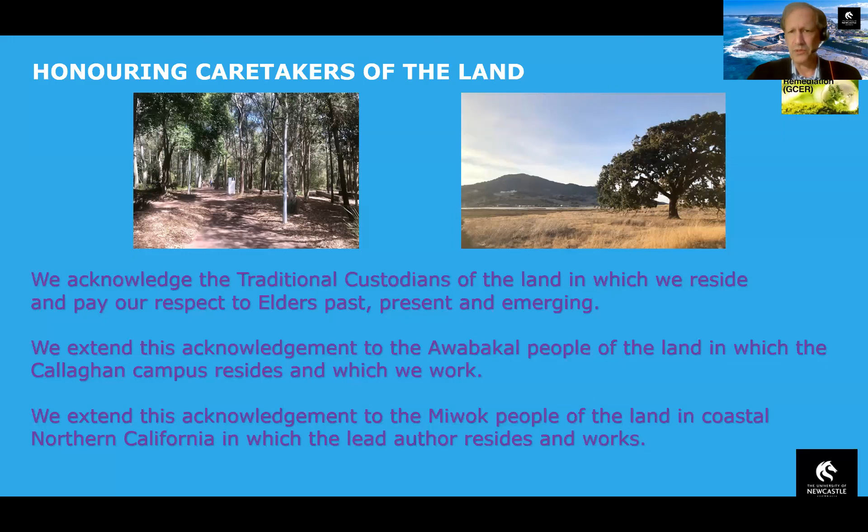So today, over the next 15 minutes, why is this different? That's what we're going to talk about. We talked yesterday in one of the sessions about sustainability. We're going to bring that forward and also add the ideas of resiliency and durability for our groundwater treatment remedies, because that's where we're headed, right?

Our designs primarily to date have looked at historical climate records, maybe current, but moving forward is something different. We have to look at those changes, talk about the effect of changing conditions on the remedy, and then we'll close it out.

There is a lot of information out there that tells us about what the climate conditions are going to be throughout the world. We have information for Europe, Australia, North America, South America. Moving forward there's still uncertainty, but we see these trends. Fortunately, we have research and government agencies that allow us to capitalize on the information collected on downscale models, and we start understanding what these trends are that we're going to see.

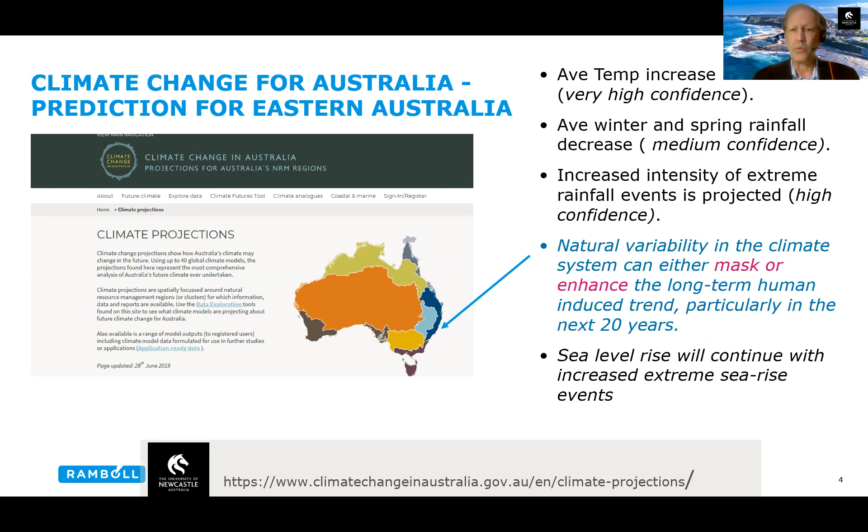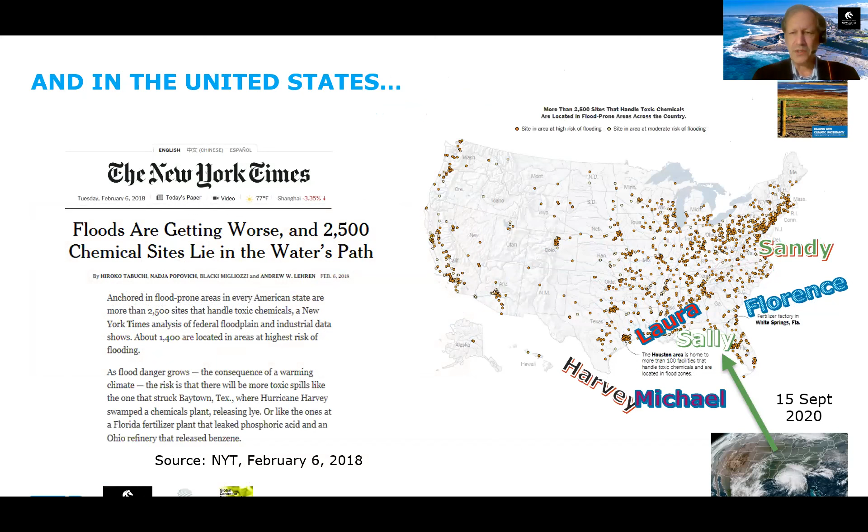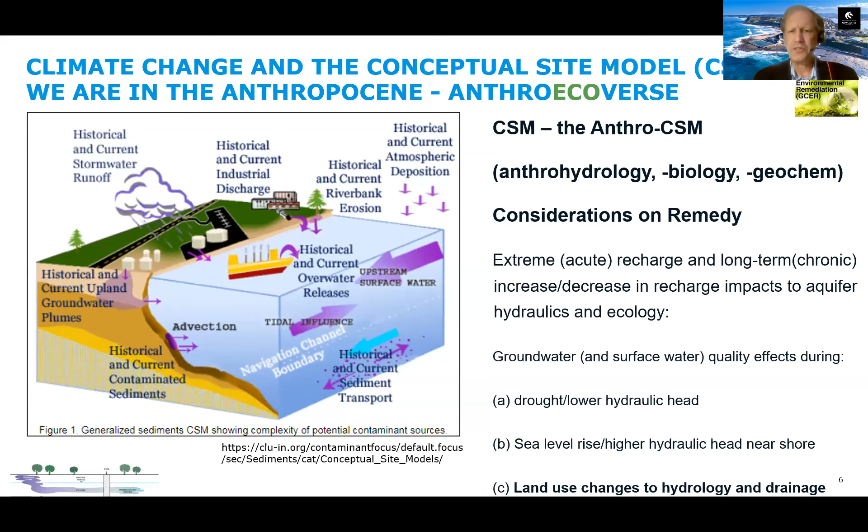We've changed our ability to infiltrate, think of urban soils for example. We've brought in different materials from different places. We've changed the carbon content, the oxygen content, et cetera. So the issues about changing hydraulic head today and into the future, sea level rise, groundwater rise, land use changes, this all comes back into it.

I want to quickly bring in these terms. Yesterday there was a whole session on sustainability. I'm bringing in the concept of resiliency, the ability to recover from these changes. And then durability, which the US federal government identified 5 years ago from the standpoint of looking at long-term measurable benefits. So the designs are looking at that.

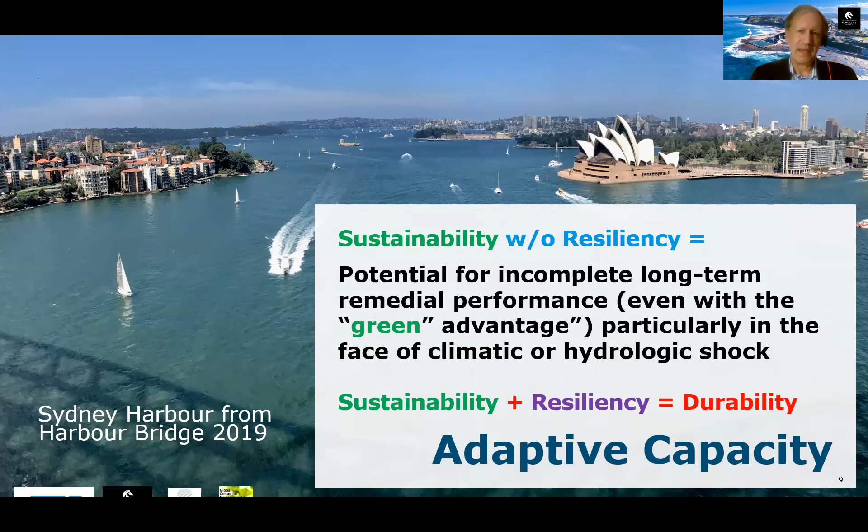I want to put out there this beautiful view. If you haven't walked across the Sydney Harbor Bridge, please do so. It's a beautiful site. There are environmental sites that ring the entire harbor, and the issue of sea level rise, once again, in this catchment is important. It's not just about being green, right? It's about, can we make these systems last and become durable?

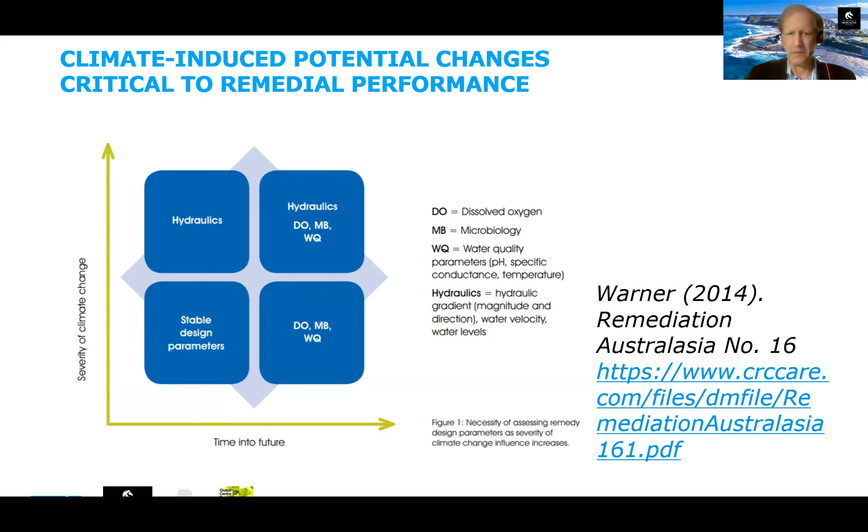This is one of my favorite slides from the standpoint of the range of really good approaches, and one of the questions is, if these remedies have to last a long time and we can't, say, remove the chemicals or create our risk management protections in a short time, we may have to deal with some of these changes. So the longer in time we go, the more the changes we might expect in hydraulics, dissolved oxygen, microbiology, and water quality, pH, et cetera. This is kind of the key thing about designing going forward.

Quick example, the PRB - I mentioned I worked on this for 25 years. This is not an unfamiliar technology. It's been used in Europe, Australia, the US. The issue is we're trying to create this barrier of some treatment material. Here's actually a picture of the very first one that went in back in 1994, across a contaminant plume, using a material - in this case it's zero valent iron, it could be a bio material, it could be a compost, et cetera - and create these treatment areas.

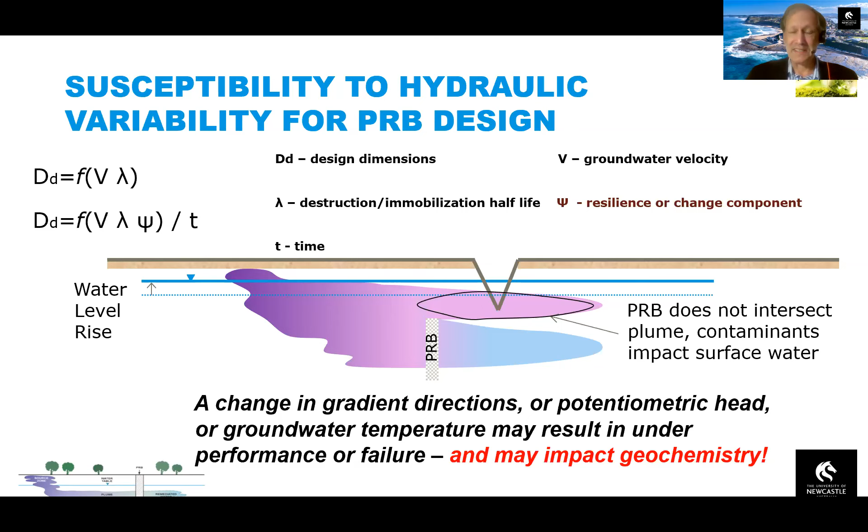If the water level changes and we lose capture, we may lose capture of our treatment, right? So that's one of the questions: how do we deal with being able to anticipate this, and how do we deal with actually designing for it? I'm not going to talk today about how to anticipate it - we'd probably take 5 days talking about models and all that and what we're going to use. But I do want to bring in that aspect of the conceptual model and some things we can think about.

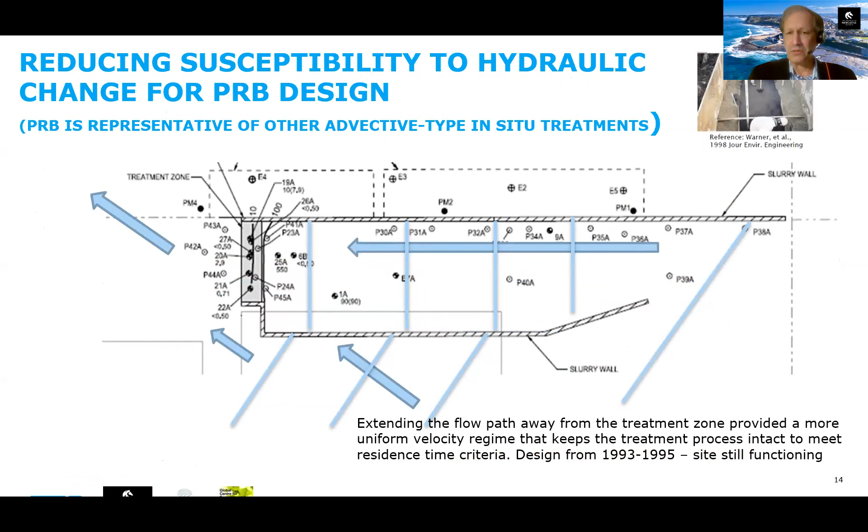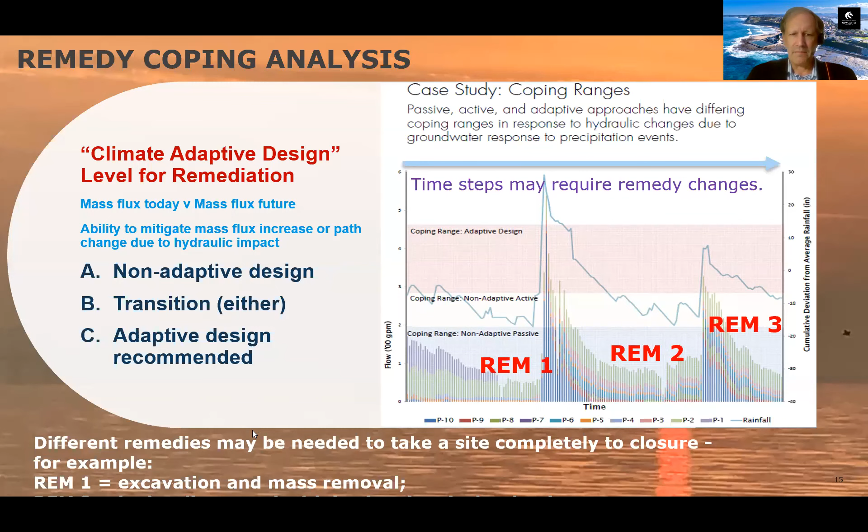This diagram you see in front of you is an actual example, as we're using, say, a bioremediation system. Is there a way to encapsulate or protect, maybe remove oxygen with another amendment? Iron is a good one, so that we prevent the oxygenation or the oxic effects, the aerobic effects, from taking over if we anticipate that happening, right? So we may have a whole different set of these going forward.

So let's wrap up here in what we've talked about. Thinking about future changes is part of our job. If we're in a sea level rise area, and we're interested - this came up actually in a course I was teaching a couple of weeks ago - the issue of, well, what kind of phyto vegetation should I use on a coastline? Maybe there's a salt tolerant vegetation that works just as well as a non-salt tolerant vegetation, but can actually accommodate those changes in sea level and groundwater, right?

So thinking about that for the hydraulic gradient changes to a PRB as an example, which could also be a bioremediation system, looking at redox zone designs to handle those changes, redundancy in our hydraulic capture buffer zones. I think one of the more important things we have to do - and there may be some talks on this later today or tomorrow, if not we'll make one - is to look at monitoring innovations: in situ redox monitoring on a regular basis, in situ hydraulic monitoring on a regular basis, because those longer term changes, sometimes subtle, is what we're interested in to help us.

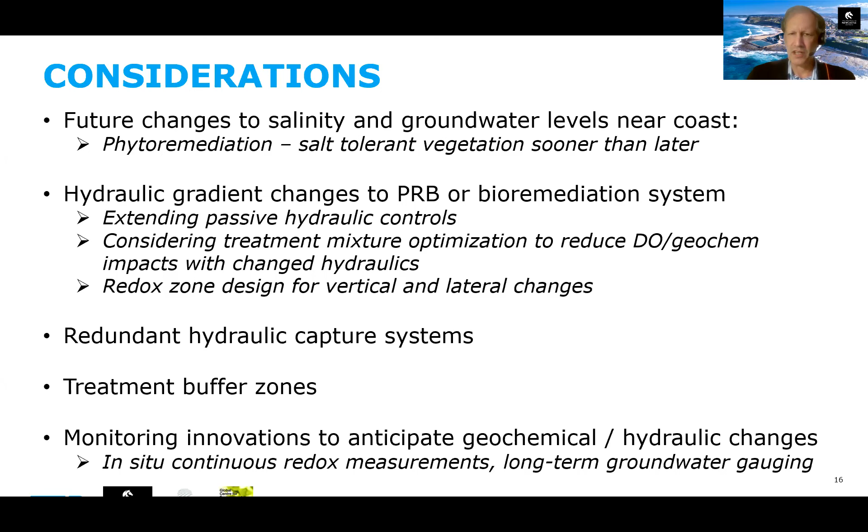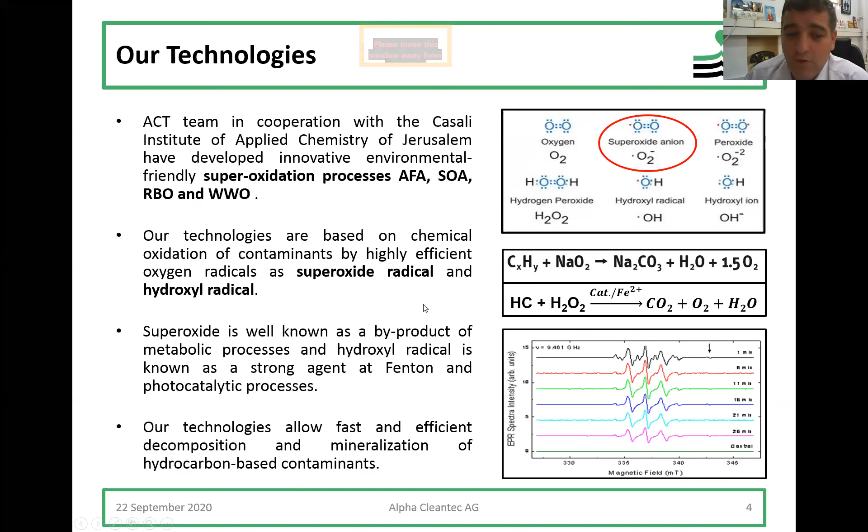So we propose three types of technologies, three types of solutions, and three types of application: soil treatment, wastewater treatment or groundwater treatment, and the cleaning of railway ballast. All the processes are in situ or on site, depending how you consider it.

Our superoxide radical allows us to efficiently decontaminate a wide range of different organic materials. We're talking about BTEX group, petroleum group, aromatics, polyaromatics, chlorinated solvents, PCBs, dioxins, pesticides, herbicides. All of them can be efficiently decomposed by our methodology.

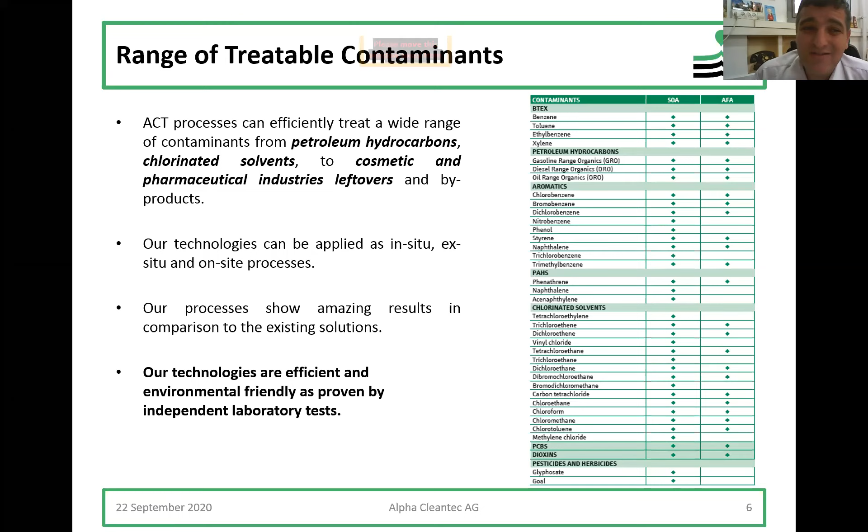And the biggest advantage of this is that it happens very fast. Our methodology is extremely fast. We may be one of the fastest solutions on the market because the radical attack is extremely fast. That's what allows us to decompose highly concentrated contaminated soil or water in a time of minutes to hours.

Here you can see some examples of materials that we treated. For example, PCB decontamination - we can reach more than 90% conversion in a single treatment. Also diesel leftovers or crude oil - in all cases, we can reach very high conversion levels under a simple single treatment.

Our process is efficient for contaminants from concentrations of 0.1 ppm to 100,000 ppm - it's really for a crude oil spill, okay? Recently, our technology was also chosen by the Solar Impulse label. They decided that our solution is efficient and green. We're one of the 1,000 technologies they chose to promote.

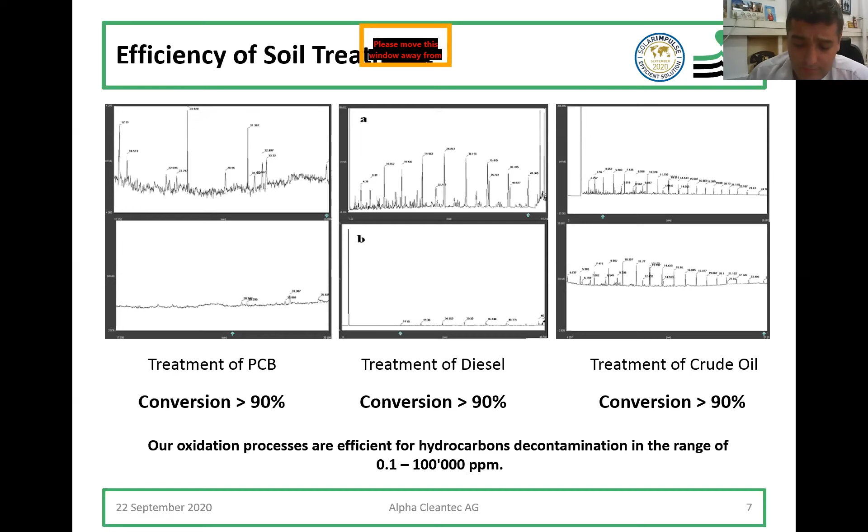And here we can see some examples of decontamination of chlorinated materials. We can decompose a wide range of different types of chlorinated materials, and the only end products in this case will be carbonate salt, a little bit of salt, and oxygen. We can do this for very high and very low concentrations of chlorinated materials.

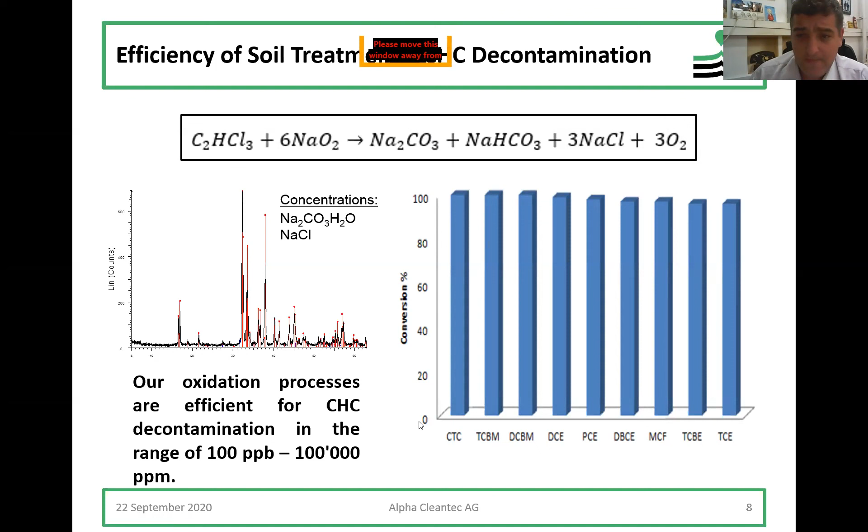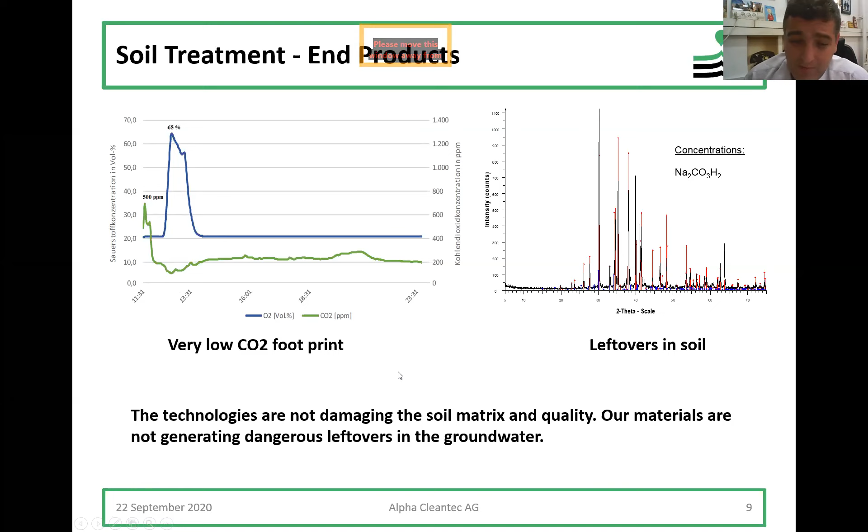A little bit about CO2 footprint. Our technology, as I told before, is unique in that we have a very low CO2 footprint. We are not generating carbon dioxide at all, almost at all, unlike any standard incineration or oxidation process where you take in organic material, add oxygen, and get carbon dioxide. In our process, the only end product is carbonate salt. We mineralize the carbon dioxide as well. So our CO2 footprint is extremely low, and this was proved by TÜV Germany's independent investigation.

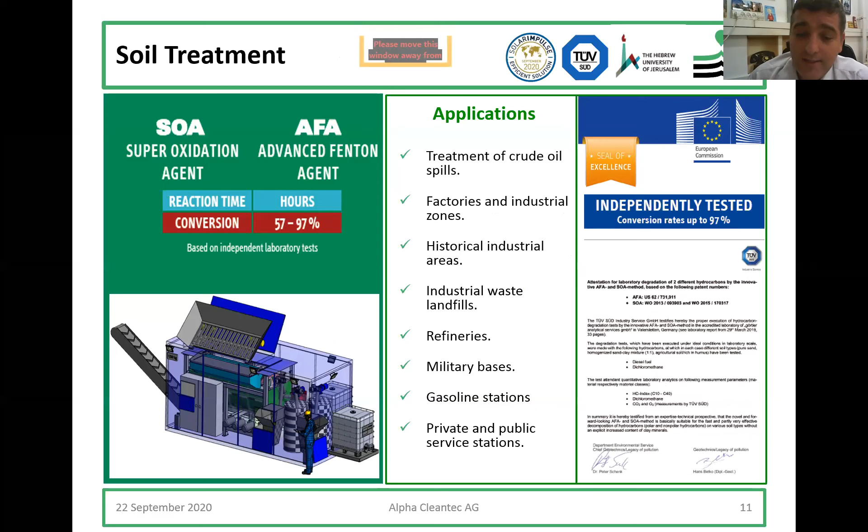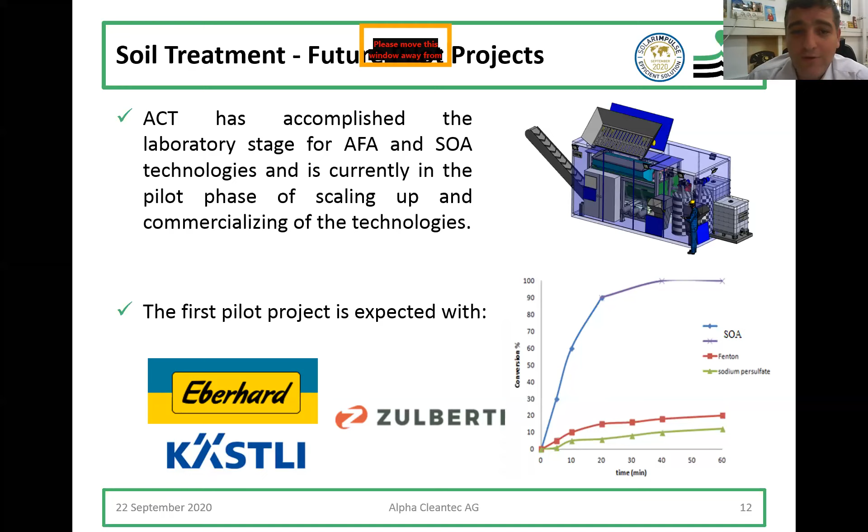As I told you before, we were certified by TÜV Germany. It's an environmental and efficiency standard. We were supported by Horizon, and that's where we are. We're starting first pilots with two Swiss companies, Eberhard and Kästli, and one Italian company, Zulberti. Hopefully by the end of the COVID crisis, we can start first executions.

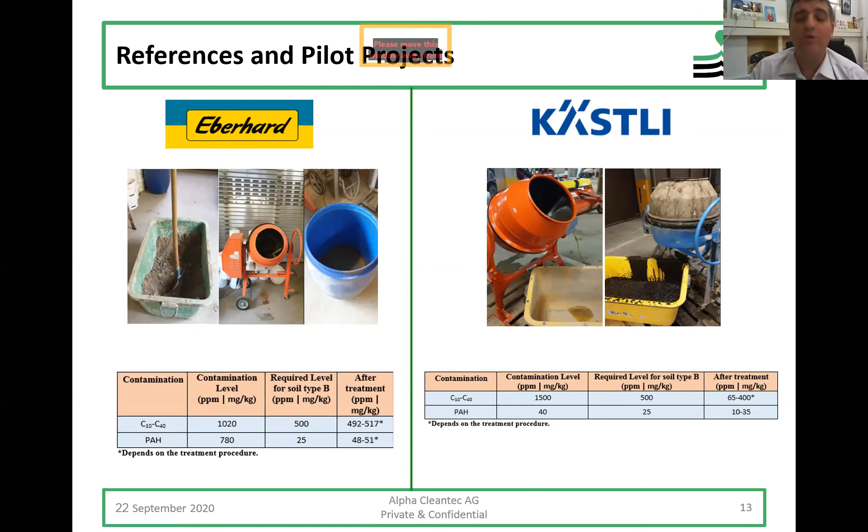We can see the same here. We started from 1,500 ppm and finished with 65 to 400, depending on the procedure. For the polyaromatics, we finished with 10 to 35. So the technology is really efficient. It can also decompose contaminants in real case scenarios, in real soil with all the garbage you can find there, and it's still working.

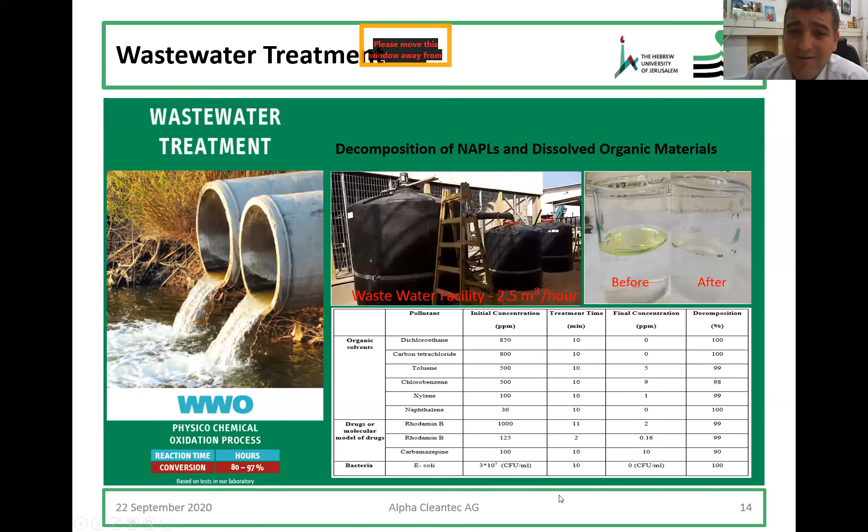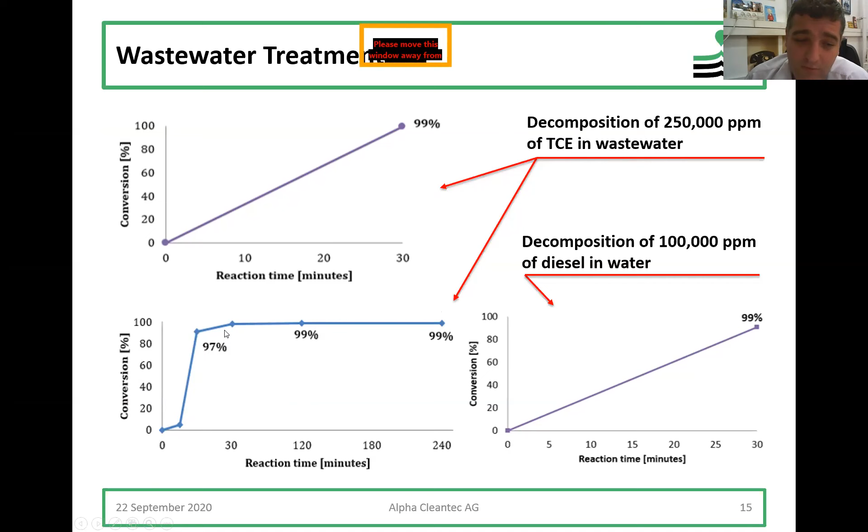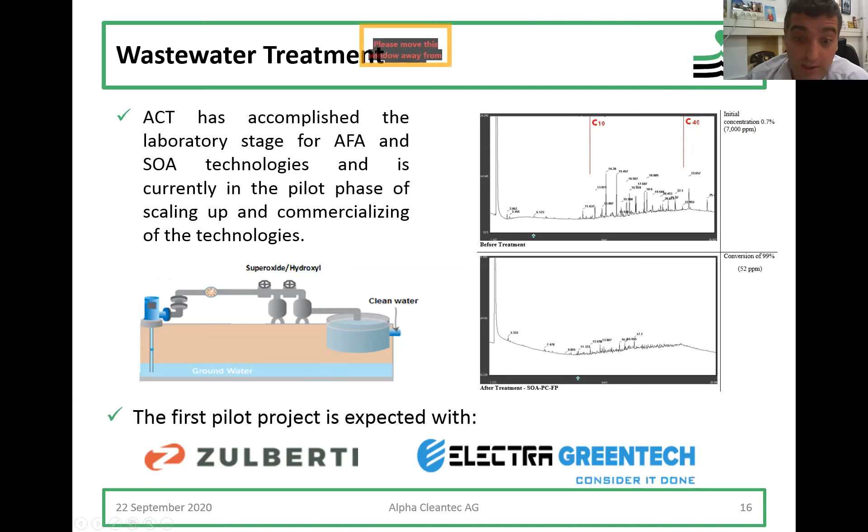Some results from wastewater decontamination: we worked on one site, actually in Italy, with a contamination level of 7,000 ppm, and with our reaction we reached 52 ppm at the end of the process, with an extremely high conversion of 99%. It was only a 40 minute reaction. Thank you very much.

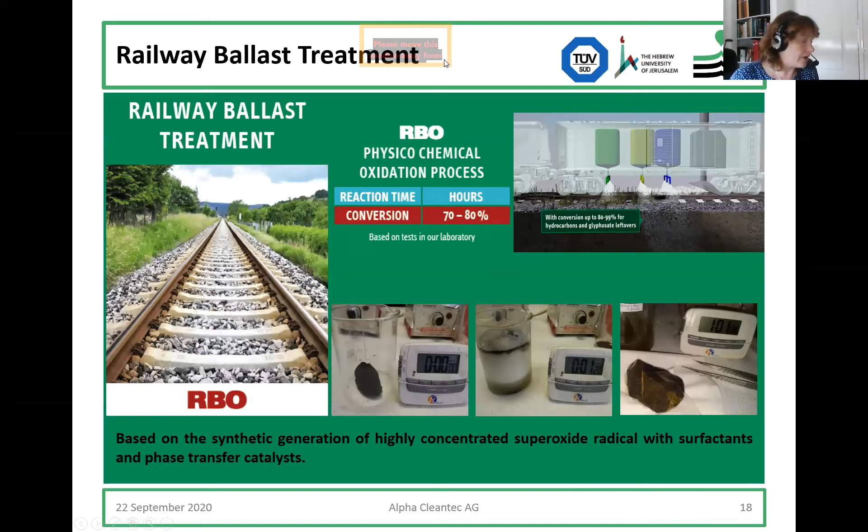Nicola, thank you very much. Appreciate everyone joining us today and the opportunity from Remtech to present. I am Troy Lizer, Technical Sales Director, North America, also working in Europe with Provectus Environmental Products. We are a technology provider based in the United States, but we have partnerships throughout Europe, Southeast Asia, and Latin America as well. My presentation today is on a new and integrated biochemical electrochemical method for remediation of contaminated groundwater.

As we bring new technologies to market, there has to be a need for it. Otherwise, it's just a novelty, hey, we've got a new technology. But if there's not a need or an application, it really serves no purpose to us nor the market. So why is it there's a need for this new technology?

If you look at traditional ISCO approaches with chemical oxidation, there's an issue with longevity, how long the amendments are active in the subsurface and treating the contaminants we're looking at. Some of the most effective chemicals generate the radical chemistry which Yuri just spoke on. The problem with these radical species is very short lifetimes in the subsurface, seconds to microseconds a lot of times for some of these technologies.

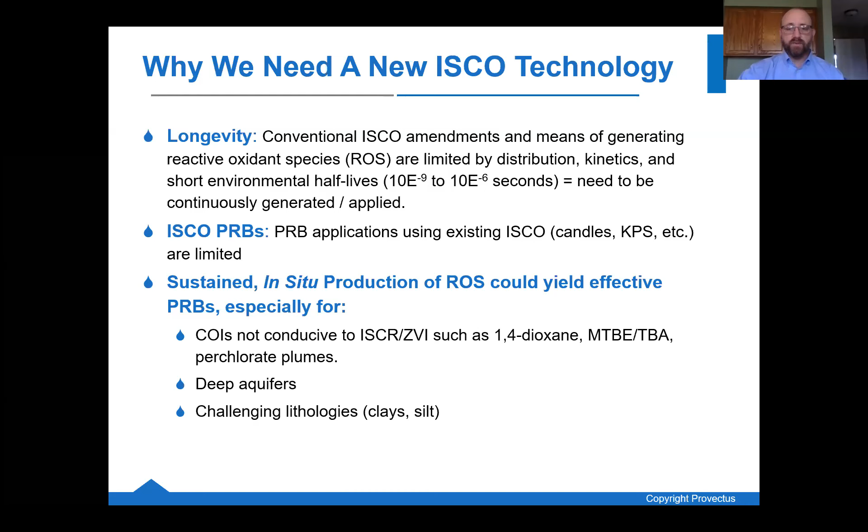But what we're looking for is a sustainable, long-lasting in situ production of these reactive oxidant species that can be effective as a PRB to go after those contaminants not treated by traditional methods, the 1,4-dioxanes, MTBEs, some of the perchlorates. We can also go after and treat deep aquifers. That would be one of the goals we're looking to, as well as those challenging lithologies, those tight soils, fractured rock, karst, those type of materials.

So what we've been able to do, in a partnership with the Elgressy group out of Israel, Provectus has our Provect EBR ISCO, which can be utilized as a PRB. This is a system that continuously generates Fenton-type reactive oxidant species.

Now, being able to do this, we can go after those challenging lithologies. There are certain situations where currently you see sorption or sequestering or use of carbon. That may not be an effective approach, and we want to actually implement an oxidative approach.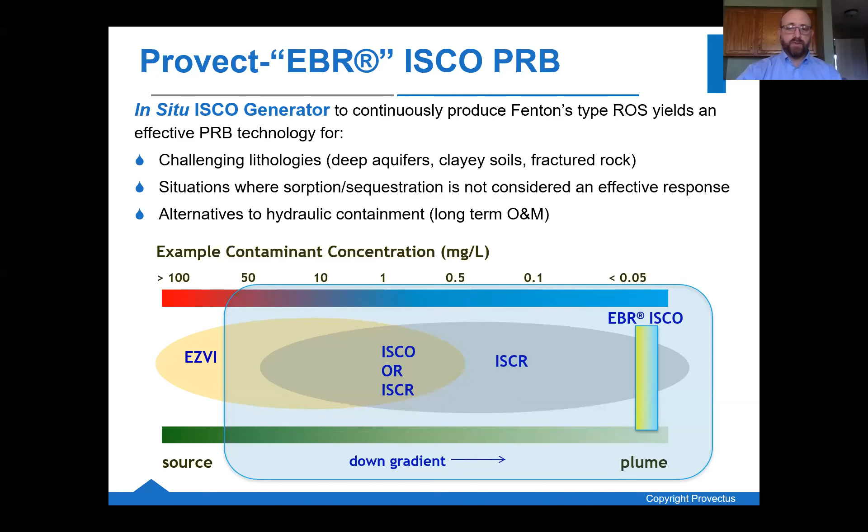This would be an alternative to the pump and treat or hydraulic containment operations that are typically long-term with high O&M requirements for the clients and the engineering groups that are implementing them. With the EBR, this is effective over an extremely wide range of contaminant concentration, so it overlaps where other traditional remediation approaches have been applied.

So what exactly is this? The EBR system contains three electrodes, one for production of hydrogen peroxide, one that produces elemental oxygen, and the other that generates an iron release. This is borrowed from fuel cell technology, and it mirrors the Fenton's chemistry in the oxidant species that it produces.

So this technology is patented both in the US and in Europe through the Elgressy group. Provectus has an agreement with Elgressy's group to provide this technology both in North America, as well as in Europe and in certain portions of Southeast Asia.

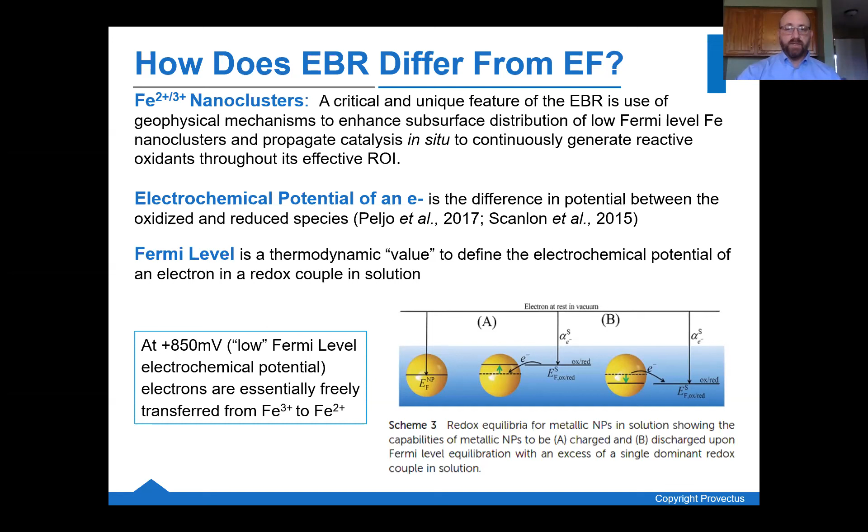Again, we're at those higher ORP levels, showing here at plus 850 millivolts. We get that electrochemical potential to allow that single electron shift from +2 to +3 for iron to act as our activation species. This technology, at this point in time, was developed by the Elgressy group out of Israel.

In 2019, there were 35 active gas station remediation sites in Israel, and 14 of those 35 were using the EBR technology. We also have 2 chlorinated sites in Israel, as well as 1 pilot site at another location in Europe.

Of those sites that have been treated, 7 have been awarded what they consider clean closure, reaching targeted levels after 1 year of monitoring and operation. This is an ISO certified technology, and it is approved by, and is actually the go-to technology for, the Israeli Water Authority for these active sites.

Currently, we don't have a PRB application here in the States. We're evaluating about a half a dozen sites here that we're looking at, and we should have one in operation by the end of this year or early into 2021.

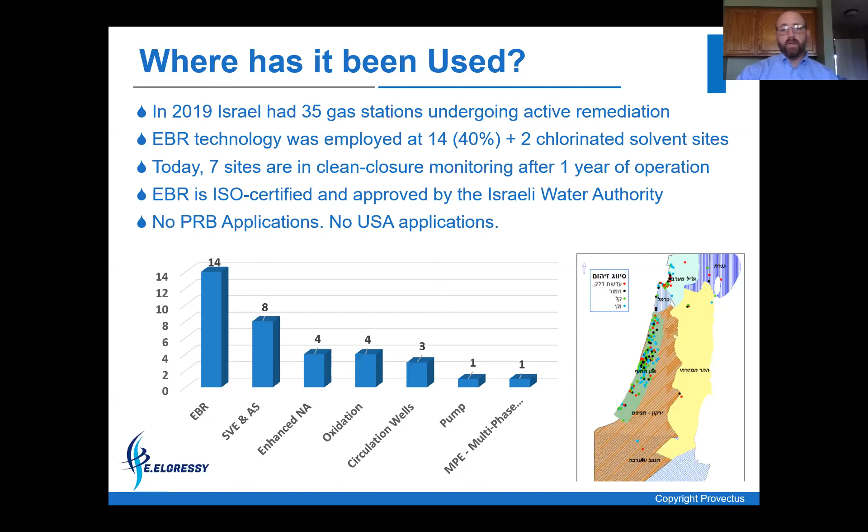One quick case study I'd like to go over on the technology. This is the Neve Tzedik site in Israel, a fully functioning operating gasoline station, with groundwater at about 7 to 8 meters below ground surface. It is a sandy aquifer with some silty clay lenses.

Our typical contaminations for active groundwater sites: we're looking at MTBE at greater than 50 milligrams per liter, which is pretty high contamination for MTBE, and TPHs of over 100 milligrams per liter. Total size of the area is about 242 square meters. This has both the 5 EBR wells as well as an SVE portion to pull vapor up out of the vadose zone.

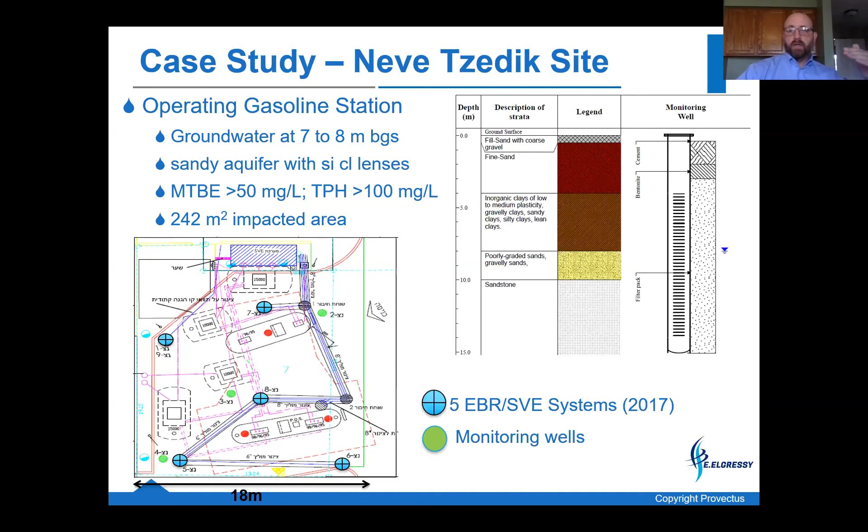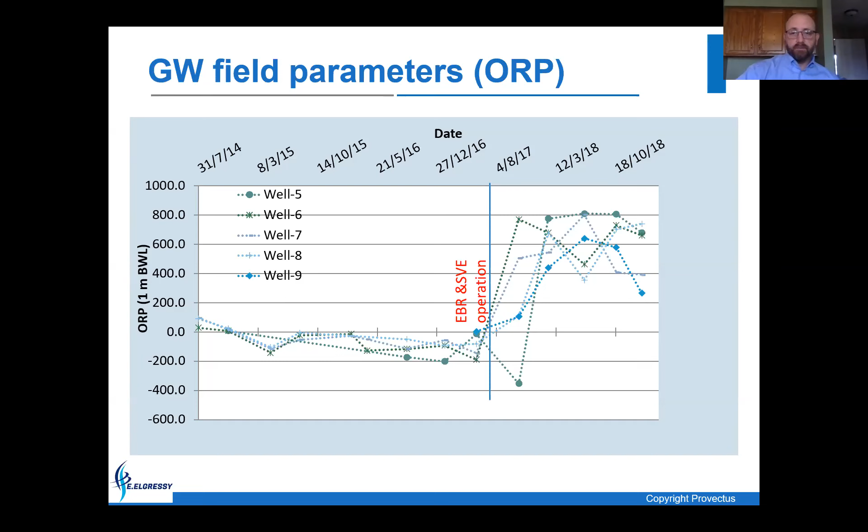Some of the data from the site: these are samples taken 18 months after implementation. You can see there were 3 target areas, areas A, B, and C, where the EBR well networks were deployed, with the TPH levels shown on the right-hand side.

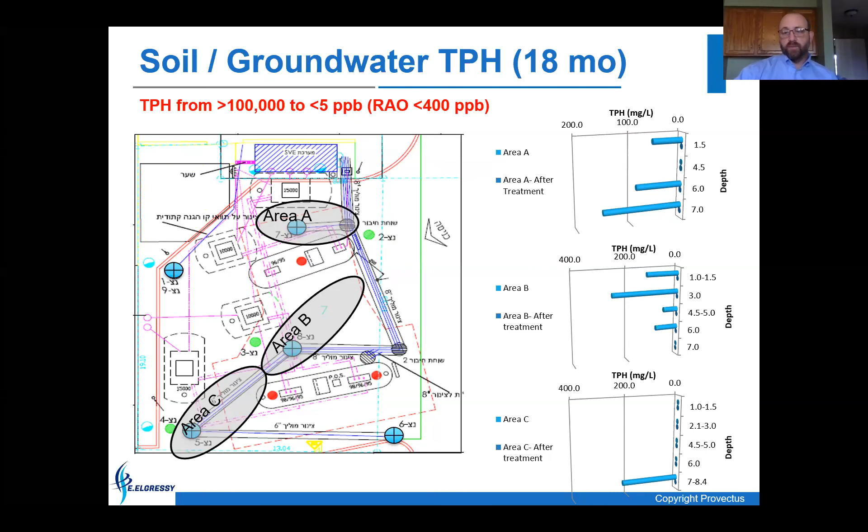The lighter blue is pre-treatment, and you can see the dark blue areas at various depths post-treatment, where we've been able to nearly completely eliminate all contamination at all depths, both in the vadose zone as well as in the saturated zone. You see similar results with the MTBE contamination.

Pre-treatment and post-treatment, again at various depths from 6 meters below ground surface up to just a meter below surface, which is in our vadose zone area.

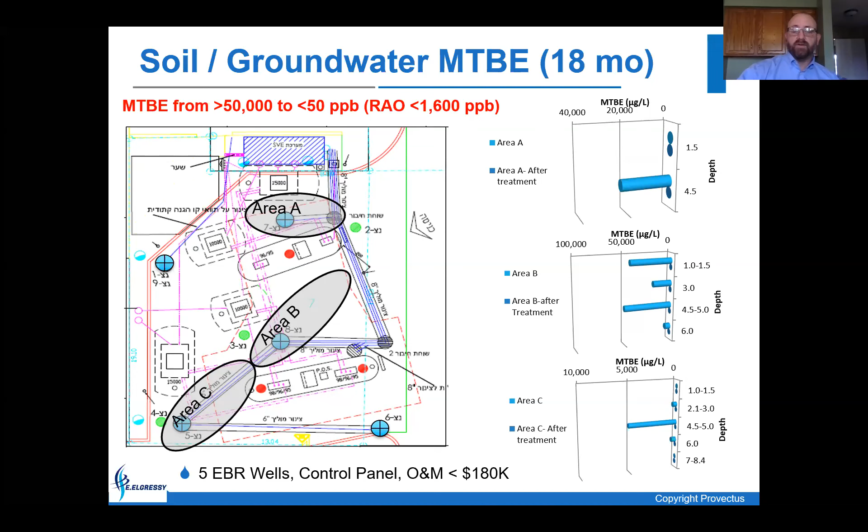This particular site deployed 5 of the EBR wells around it, and the system ran for about a year and a half. You can see our contamination went from over 50,000 parts down to less than 50 parts per billion, so we have several orders of magnitude reduction in contamination.

So again, just quickly, Provectus is a company based here in the States, but we do have partnerships with companies throughout Europe and Southeast Asia, specifically with Claudio and his group, BAW Environmental Engineering in Italy. We and our partner groups are certainly welcome to take a look at different sites and review the needs and wants to determine which technologies are warranted.

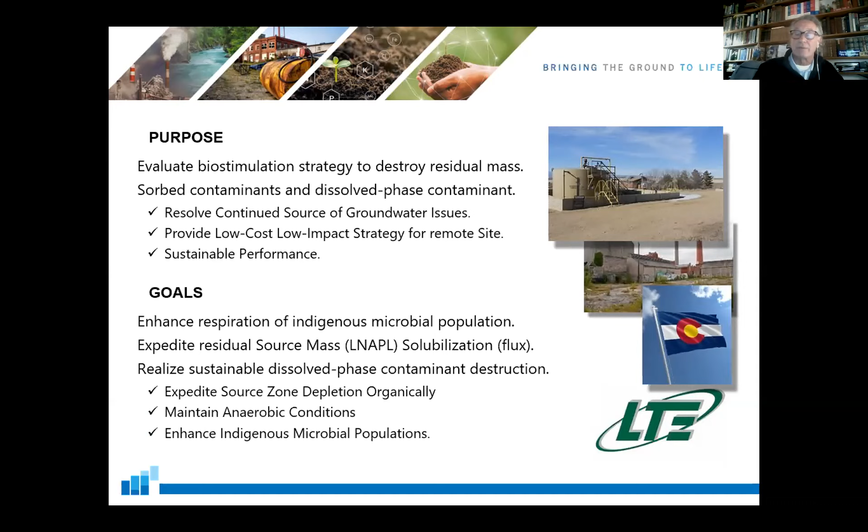In 2014, there was a lot of effort out at this site. They excavated several hundred cubic yards of material and then augmented it with a carbon additive on the floor of that excavation.

In 2014, they developed a barrier, backfilled with a carbon-based additive, about 5,200 pounds. Then in 2014, they performed an ISCO program, which included the installation of 26 injection nodes with a vertical impact layer between 6 and 10 feet, and injected persulfate and silicate in solution, about 14,000 pounds. So over 2 years, they put about 20,000 pounds of additive into the ground.

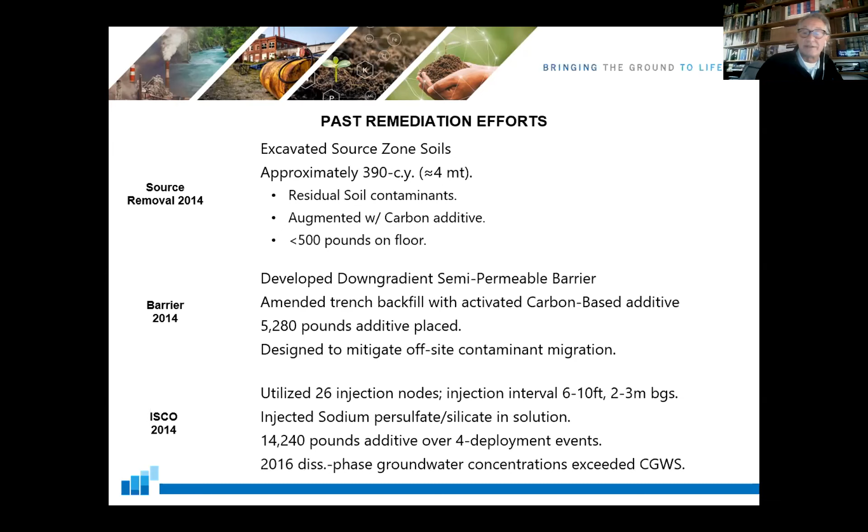During that process we had 2 monitoring wells, 2 monitoring locations: MW07, which is inside the tank battery, and MW04, which is outside the amending zone. This started in 2017.

Initially, with the first deployments, as we're increasing the additive availability, the dark blue line, we see an immediate decrease of the bioavailable dissolved phase contaminant, the light blue line. In fact, BTEX decreased 84%, benzene 91%, xylenes 99.9%. This is because we produced an additive, we introduced it, and looked at the treatment zone as an ecosystem.

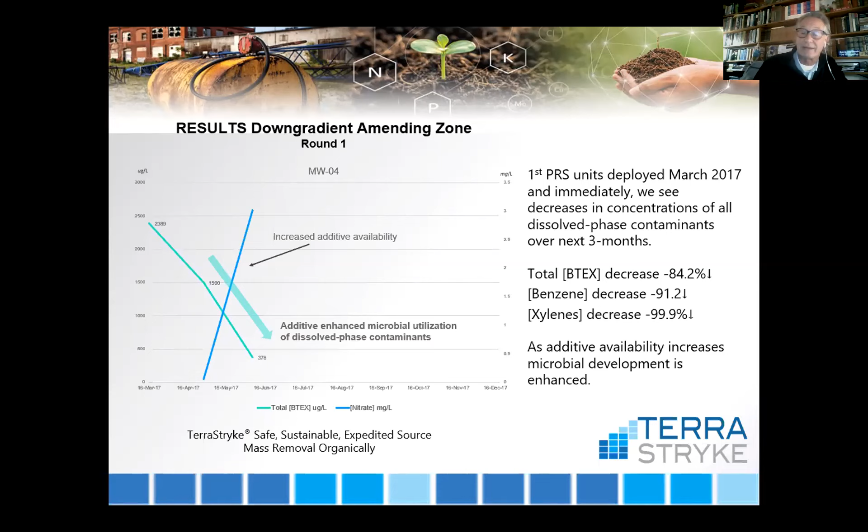We're looking at this holistically. We were able to get this system going, and the microbial densities grew. As the densities increase, they're actually able to increase their ability to communicate. As their communication increases, they actually start building protective structures if you can maintain anaerobic conditions and provide the proper nutrients and components necessary for this activity to occur. It's the creation of a biofilm.

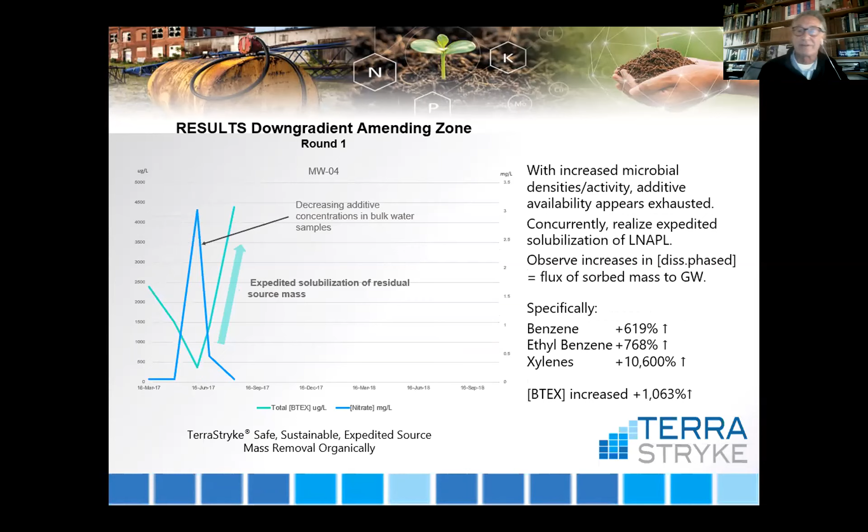Immediately after that, as we reach peak, we see peak bioavailability of the additive, the dark blue line, and we see the lowest level of the BTEX in mid-June. All of a sudden, with the increased biological activity, we see solubilization of the contaminant coming out of the soil mass. This expedited solubilization is getting your rebound out up front. In fact, we had some tremendous increases in the dissolved phase concentrations. This is where I go, come on, microbes, let's get going.

Soon after that, as the contaminant itself has been extracted out of the soils and becomes available, the microbial densities are such that they just start, and the dissolved phase contaminants are available, and we realize 99, 97, 98% destruction of the BTEX components at the end of a 2-year period.

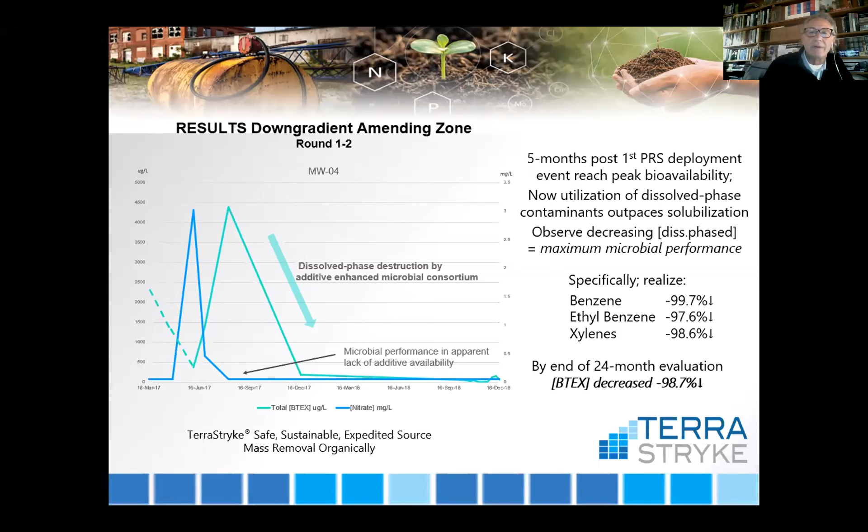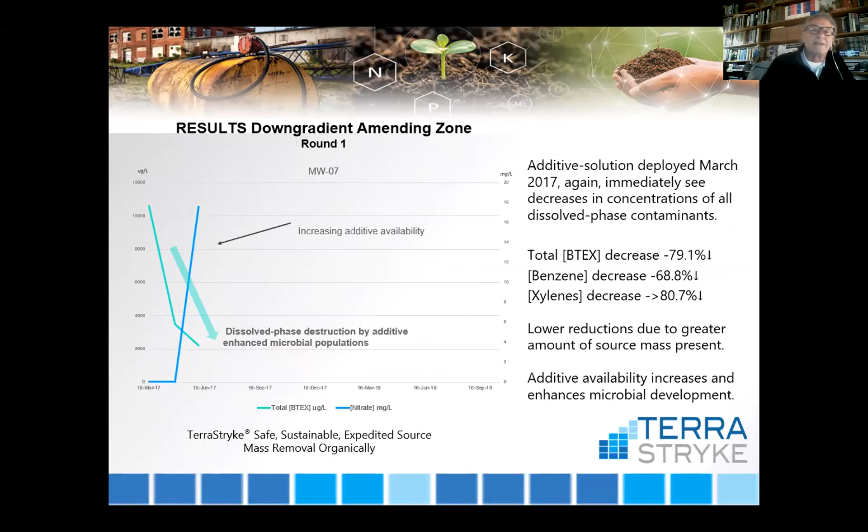Now we're at MW7, at the down gradient zone. Again, we see immediate decreases in BTEX with an increasing availability of the additive. Subsequently, as the additive appears to be exhausted, we see solubilization of that residual mass, very high levels, 500% increase in overall BTEX contaminants.

Then in December of 17, there was a 10-month delay between deployments. But in October of 18, as soon as that solubilization is completed, we see a destruction of the BTEX compounds. We still have some benzene that needs to be addressed, but after a 2,000% increase in BTEX, we saw a 94.5% decrease.

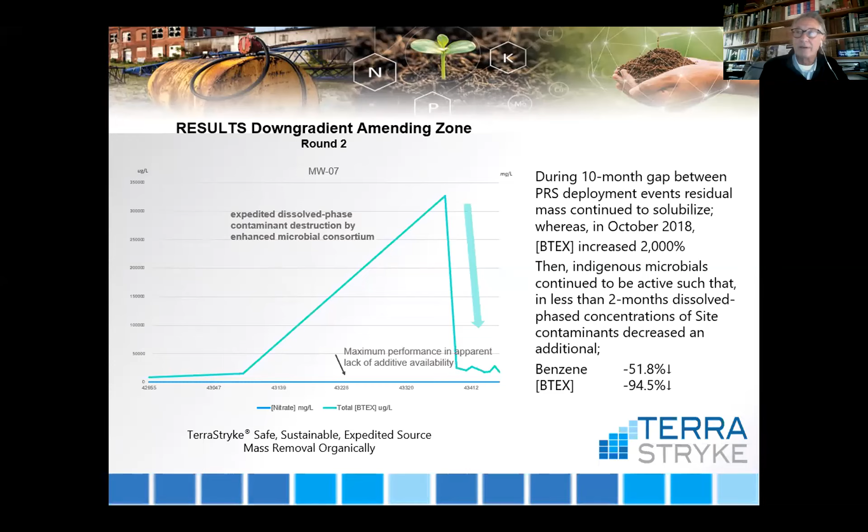So we're getting it out of the soils. We're eliminating a rebound. This is all done organically by the microbes themselves. We're not introducing surfactants; they produce them themselves, if we can reach density levels sufficient for them to communicate, as I said before.

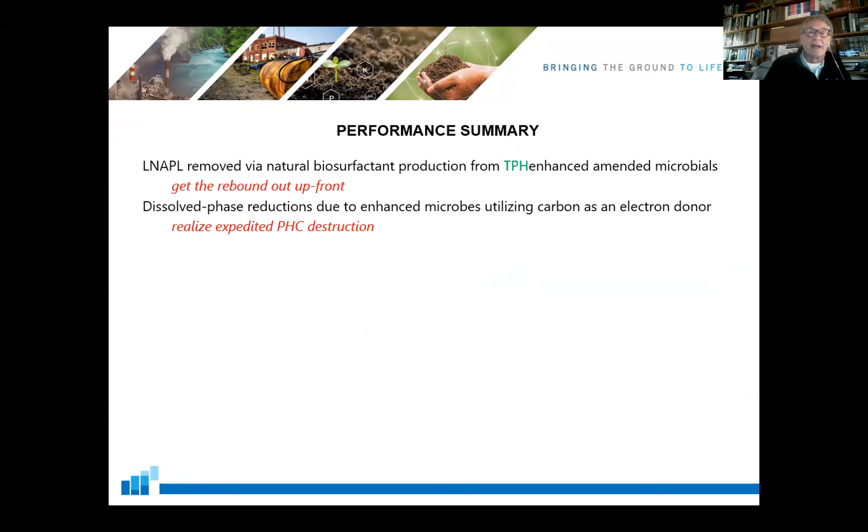So in the performance summary, we saw that the L-NAPL was removed via natural biosurfactant production and by the enhanced microbial populations. We got the rebound out up front. We then saw dissolved phase reductions due to the enhanced microbes using the carbon as an electron donor, realizing expedited petroleum destruction. The removal of the residual mass from the low perm zones is organic and sustainable.

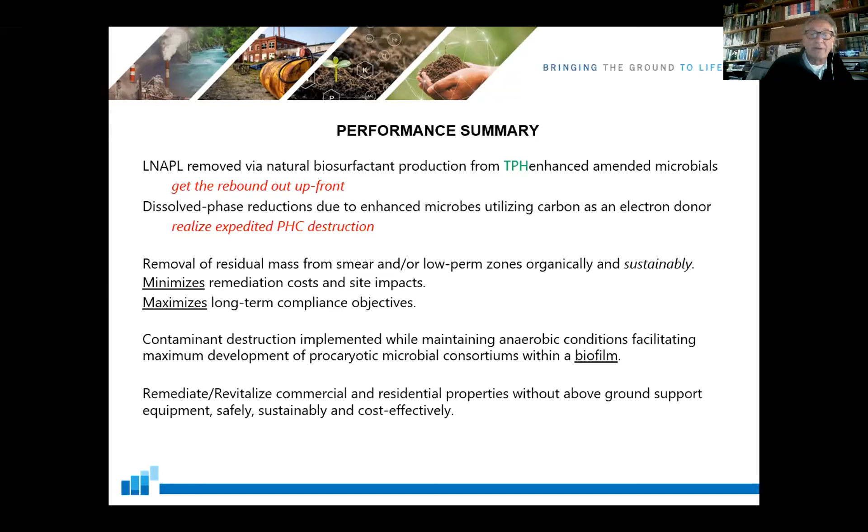We minimize remediation costs. Remember, we used about 50 pounds of additive over a 10-month period and had evaluations that went on for 2 years. We maximize long-term compliance objectives by getting the rebound out up front. Contaminant destruction was implemented while maintaining anaerobic conditions due to the biofilm. We were able to remediate and revitalize commercial and residential properties without any above-ground support equipment, no energy costs, no emissions, etc.

Very, very passive. One of our hypotheses is the reason we see sustainability of 6 to 12 months after a single deployment at a petroleum site. I'll talk later about chlorinated sites where we're getting decades of sustainability after a single deployment.

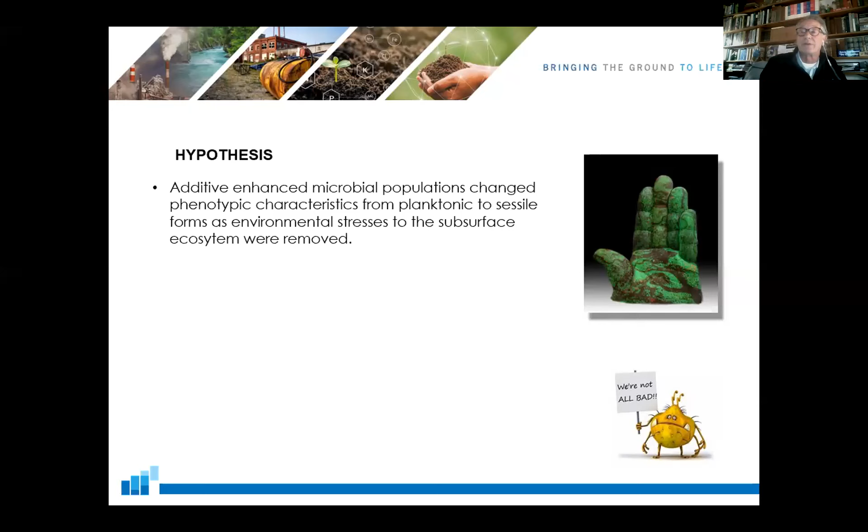The additive enhances the microbial populations, and in doing so, microbes actually change their phenotypic characteristics and stop swimming. They become sessile, attach to the matrix, and start building protective structures within this biofilm, allowing increased communication. In this process, they then start, through horizontal gene transfer, sharing and adapting and evolving over days.

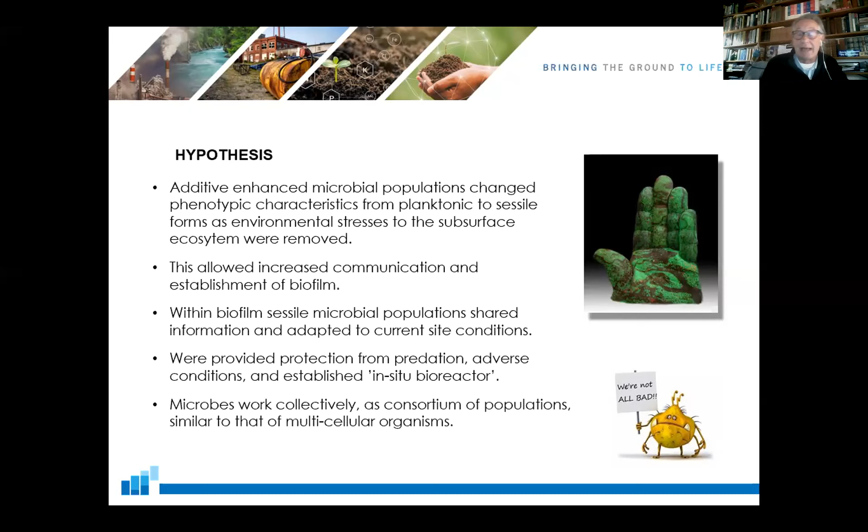We call them contaminants. They look at it as an energy resource. They begin to work collectively, not as individuals, but as a consortium of populations, and actually behave and perform as if it was a multicellular organism.

This is an artistic rendition of a biofilm. Biofilms actually grow, mature, and slough off and migrate down gradient. As a biofilm migrates down gradient, it contains this microbial population that is adapted, and if it finds similar resources and similar conditions, it will begin the entire process down gradient again without another injection.

You can also see scouts going out. But what's most interesting is inside a biofilm, water can move 100 times faster than it can in the bulk water surrounding it.

Amoebas cannot attack and destroy and eat the microbes. Horizontal gene transfer occurs 1,000 times faster than it does in bulk water.

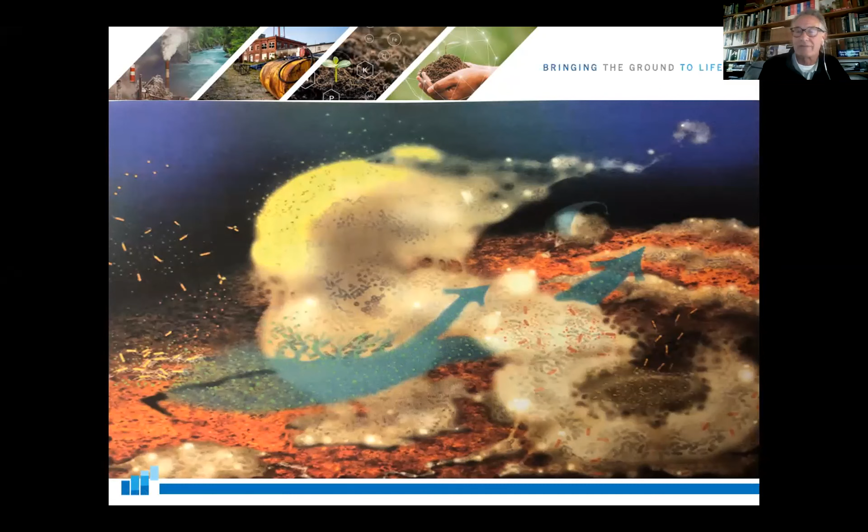Here's an example out of Seattle, Washington. What I want to show here is in these pink bars is the microbial densities during the performance of a TPH enhanced process. You can see as the additive increases, the green line, you see an initial decrease in some of the dissolved phase, but also then, boom, a big solubilization at the contaminant level.

At the beginning, the pink bar is small. We were at about 10 to the 1, 10 to the 2 population density of the heterotrophic bacteria. At peak bioavailability of the contaminant and additive, we see that density go to about 10 to the 5.

All of a sudden, though, as the additive appears to be exhausted, and later down, 2-3 months down the way, we see the population density of the planktonic bacteria plummet. It looks like they disappeared. But during that 9-month period, we have continued reduction of the petroleum hydrocarbons to attain 98.7 percent reduction on BTEX.

Later in this process, as we see the BTEX and the available energies diminish, they relinquish themselves from the biofilm. They become planktonic again, and that's why you see that pink bar skyrocket. They're now looking for conditions and other situations similar to what they just completed, because there's no more available energy there, so they stop creating their biofilm.

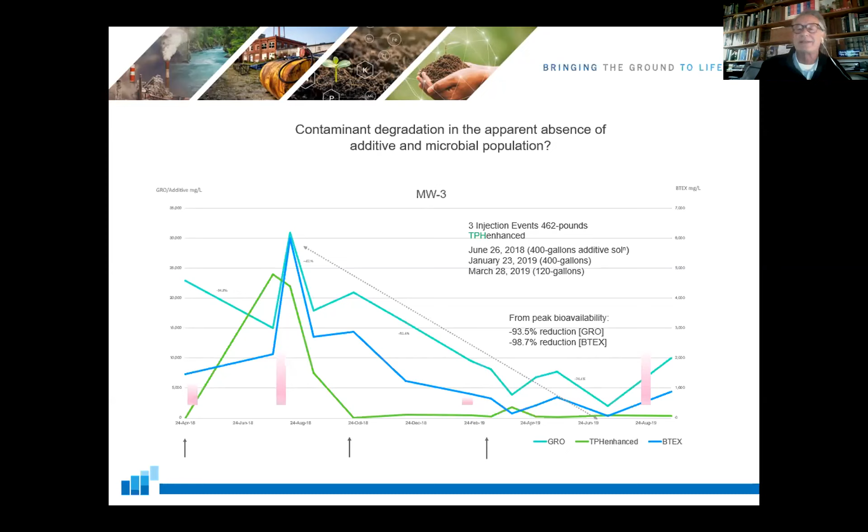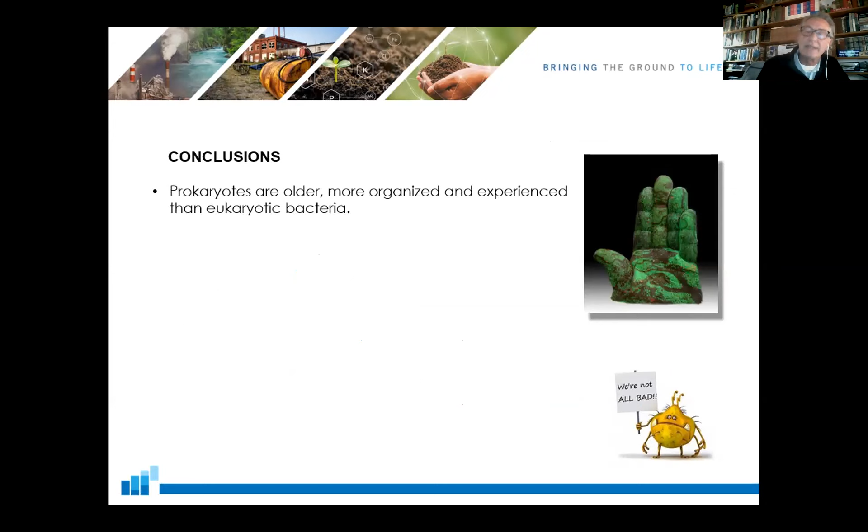Prokaryotes are older, more organized and experienced than eukaryotic bacteria. We need to keep treatment zones anaerobic. Prokaryotes are ubiquitous throughout the world.

Biofilm is the most predominant form of life on the planet. It's just that we in our industry haven't looked at treatment zones as an ecosystem, like a pond, an ocean, a tributary, an estuary. Prokaryotes dominate under anaerobic conditions. They were the first here. They're organized, they're experienced. A biofilm development is necessitated under anaerobic conditions.

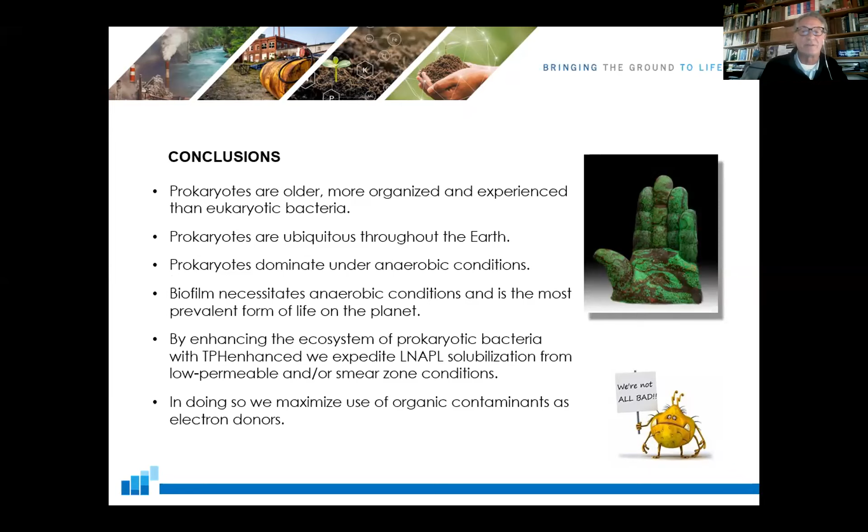You have to have anaerobic conditions. And in doing so, you enhance the ecosystem of these bacteria so we can solubilize LNAPL. We use organic contaminants as electron donors.

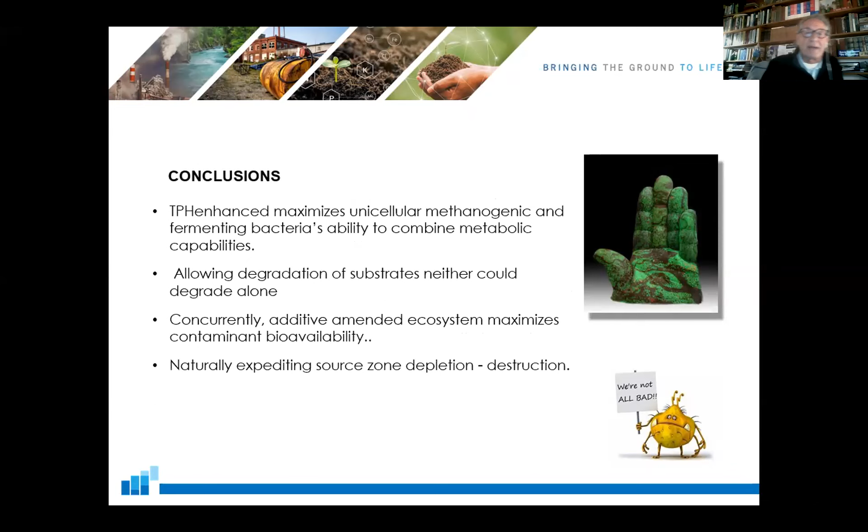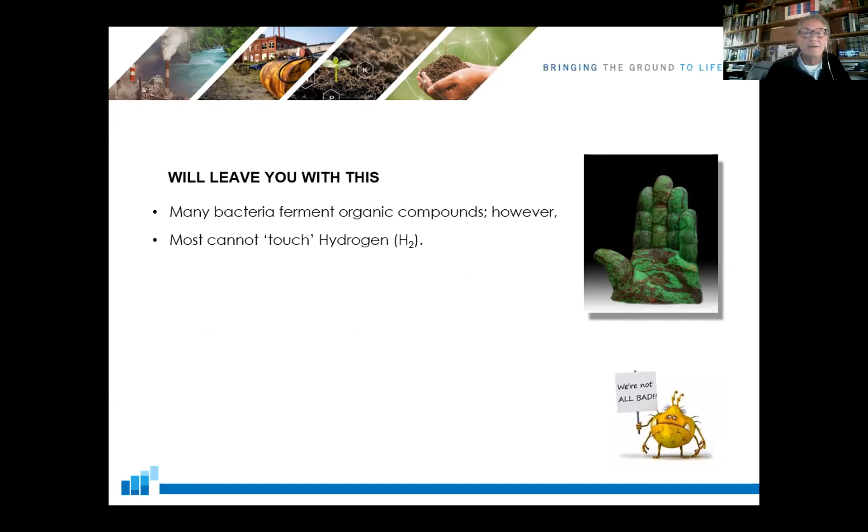TPHenhanced maximizes unicellular activity. I'm going to skip this slide real quick because I'm going to leave you with this. Many bacteria can ferment organic compounds. I said the same thing yesterday, but most cannot touch hydrogen. Many archaea, the methanogens, can ferment hydrogen and carbon dioxide, but they can't touch organic compounds.

This is why it often stalls in petroleum hydrocarbon reduction. But if we can establish a syntrophic relationship between the two, like we do with TPHenhanced, within a biofilm that the microbes themselves establish - Mother Nature's microbes, the indigenous bacteria - we create a consortium of these populations so they can use their waste as an energy source. They work syntrophically to create a consortium of bacteria to do long-term contaminant destruction the way Mother Nature intended.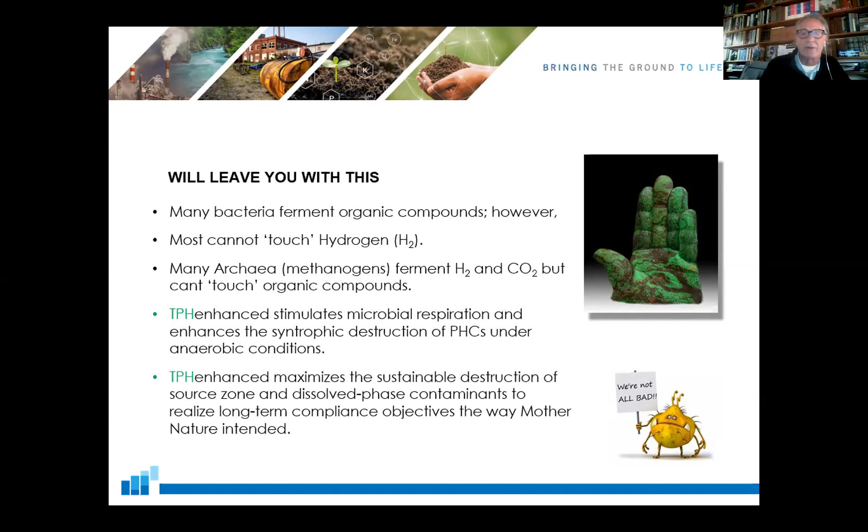There's a lot of options out there. All I ask is that you give us an opportunity to look at your site and provide you with an option and a potential organic, sustainable way to address your long-term compliance issues. And if I have, do I have one minute maybe, or 30 seconds?

To some of the things Scott said, and I think it's really - I said earlier, we're a front end, stand-alone remediation system, but at the same time, we're a polishing system as well at the back end.

After pump and treat systems have reached asymptotic levels, we utilize our additives and established infrastructure to try to go out and polish those residual mass that physical removal won't work on.

But my point here is, what is the effect of climate change? It's something we're looking at. Some feel prokaryotic bacteria are a single species with an incredible ability to adapt in hours. Our thought is, if we can create these microbial populations, they're going to migrate with the changing groundwater levels, going up and down as the levels change. Because they can adapt so quickly, maybe they'll be able to adapt to climate change much faster than what we see with eukaryotic bacteria and plants here on the surface of the planet.

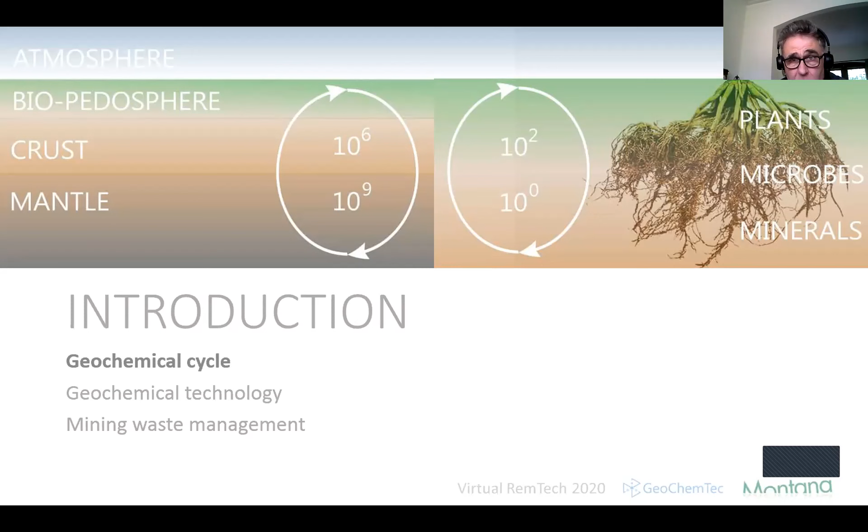Geochemical technology concerns working with minerals to control, in this case, heavy metals in the soil. Geochemical technology is not new. You can say, for instance, that Hannibal, when he wanted to cross the Alps, used geochemical technology to make passageways, heating limestones and using vinegar to split the stones and get through on his way to Rome. We use geochemical technology in mining waste management, because the mining waste management sites are always outside in the open environment and in remote areas, far away from electricity and skilled workers who can supervise the site. So what we do is try to use minerals and passive treatment technology that blend into the environment. Here you see the bacteriology side which I want to talk about later. Okay, now we go to the next one.

In Sardinia, we have 70 million cubic meters of acid mining waste, and there is 20 million cubic meters of alkaline red mud from a bauxite refinery. When you combine both, you can neutralize the acid waste with the heavy metals and immobilize these heavy metals, and then you have something that is no longer dangerous and doesn't contaminate the groundwater.

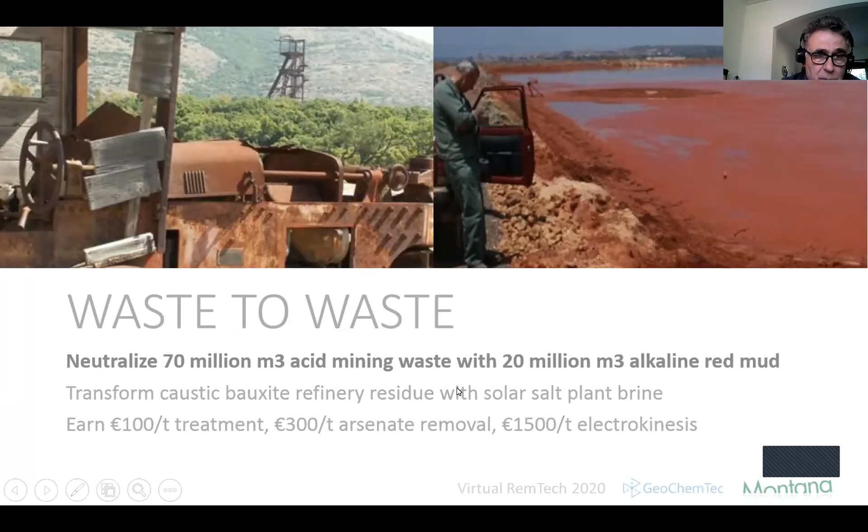Therefore, we built a small plant at the bauxite refinery residue, where we mixed solar salt plant brines with the very caustic red mud, because in geochemical technology you want mineral reagents that react rather slowly. If they react very fast, the minerals that precipitate as a consequence of the reactions are very small and abundant, and that's what you don't want. You want a low surface area and contact with your environment if you want to immobilize heavy metals.

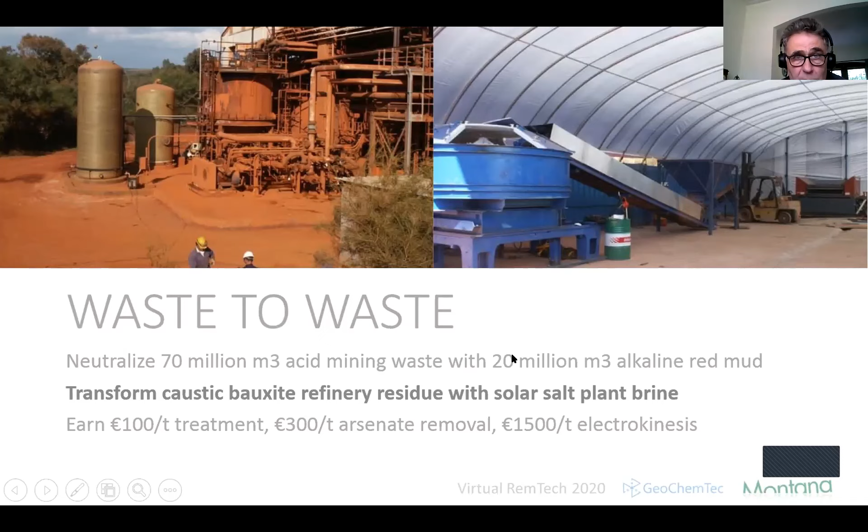It's better to have a few big minerals, and that's why we had to decrease the reactivity of the red mud by mixing it with seawater or the solar salt brines. In that way you remove the very soluble sodium caustic sodium minerals and replace them with calcium magnesium minerals, which are much more slowly reacting. We also made granules in a little factory out of the slurry of the red mud.

To give you an impression of what you can do with that mineral material and its economic viability, in Portugal we used the red mud powder and mixed it with water from a tailings dam from a dormant zinc mine, which had extremely high metal concentrations, in the order of 14 grams of iron and 2 grams of zinc.

If you treated that with normal treatment, for instance with lime, then your whole water was forming a gel. But we were able to pump up that water and mix it with our transformed red mud, then spray it again over the pond, and the very dense, very fine-grained particles captured the metals in their boundary layer while sinking to the bottom.

So we were left with a bottom of stable mud with the metals, and you could discharge the water easily. In this project, we were economically viable with a price of €100 per ton of this transformed red mud.

We also used pellets of red mud, cemented porous pellets, which we placed below mining waste. As water percolates through mining waste, normally you get very high concentrations of metals out, for instance zinc at 700 milligrams per liter in the percolate. But if you put these reactive mineral pellets below that waste, the zinc concentration coming out is almost zero.

I show zinc here, but we did the same test with arsenate, and it appeared that the efficiency of these red mud pellets is about 20% of the efficiency of the most efficient commercially available arsenate removal material, granulated ferric hydroxide, which costs 1,500 euros per ton. So we showed that with our red mud pellets at 300 euros per ton, we can compete with the industrial material.

We also have the advantage that because our material is very crystalline, it will not recrystallize, and the arsenate will stay on it, so it's stable over the long term.

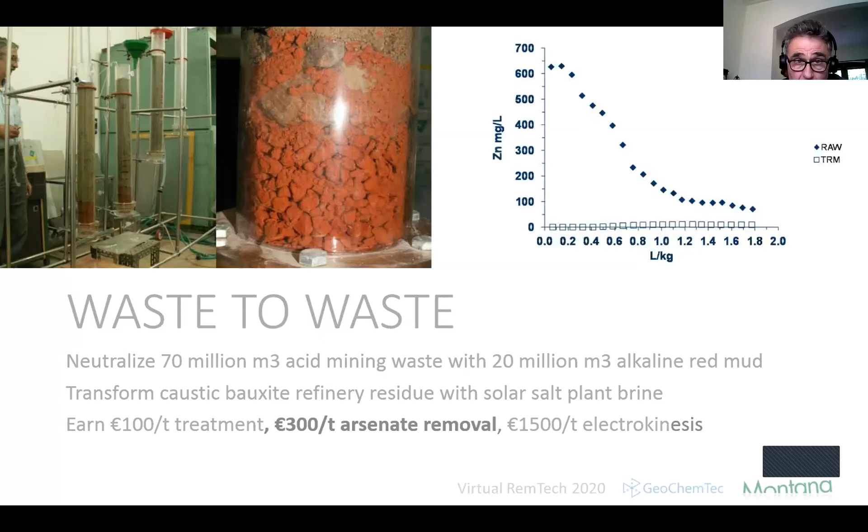This is something interesting I want to show. You can also use these mineral reagents together with electricity, in this case electrokinesis. What we did is put the alkaline, transformed red mud near the acid electrode of an electrokinesis system.

Normally the negatively charged complexes, like chromate or arsenate, move to the positively charged anode, but then absorb prematurely on the acidified soil. But if we use the alkaline red mud near the acid anode, we see that most of the chromate and arsenate moves out of the soil into the transformed red mud, where it then permanently binds.

If you calculate the cost savings, you see that with 1 ton of red mud you save 1,500 euros of electricity costs to achieve the same result as without the red mud. So now we already have 1,500 euros per ton of value for the red mud.

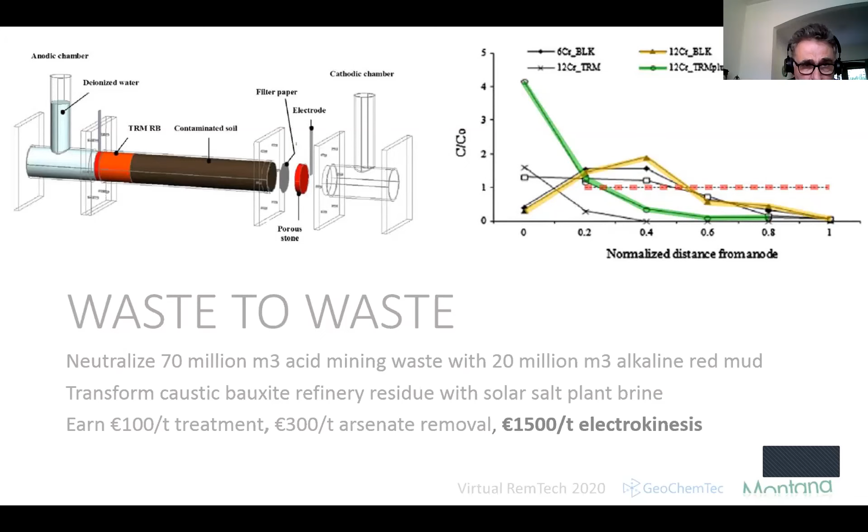Now, the problem was just when we were ready to start our biggest project, for a company together with Montana, the first big remediation of a mining site in Sardinia, the red mud from the bauxite refinery was put on hold, and we had to close our red mud plant.

In a very short time, we had to develop new materials that had the same qualities as the red mud, but made out of industrial minerals. So we bought various industrial minerals on the market and mixed them to get something like the transformed red mud. This is a lead arsenate mine where we had to raise the pH to precipitate the positively charged heavy metal cations, but at the same time prevent the leaching of the arsenate, which is negatively charged. So we also had to add something to increase the surface area for absorption of arsenate.

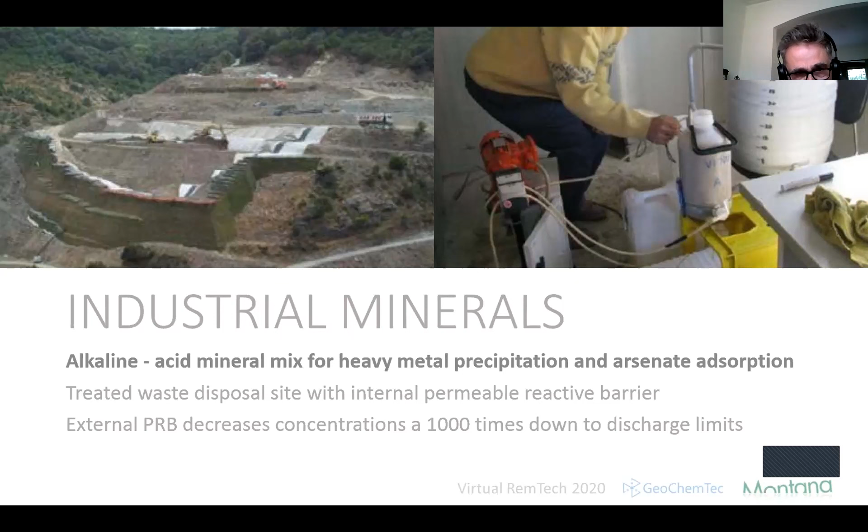We constructed a small internal permeable reactive barrier around a slotted pipe that discharged the leachate of this disposal site to the environment, and we mixed all the material with our new alkaline mixture with a high adsorption rate for arsenate. The problem was it was so potent we only had to use a few kilos per truckload, so we had to continuously analyze the material that was dug up and calculate exactly how much had to be mixed in and added manually to the truck.

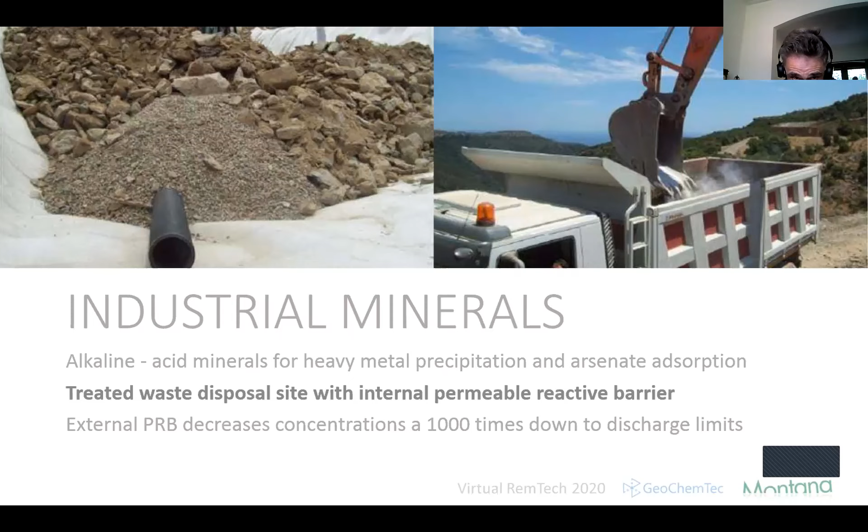Outside of that disposal site, we had to build a small permeable reactive barrier because there was no space, so it had to be small and very efficient. The water coming out of that disposal site had extremely high concentrations of zinc, on the order of 400 milligrams per liter, and cadmium was also very high.

That was problematic, but we were able to reach the discharge limits, which were only on the order of ppb—100 ppb for zinc. We could do that partly because the percolation rate of the water was not so high, only a few cubic meters per day. After about half a year, we switched filter material when it was exhausted. We observed that the beginning of the filter started to clog with aluminium gel, and the residence time and reaction time in the filter decreased, so we switched to the other filter.

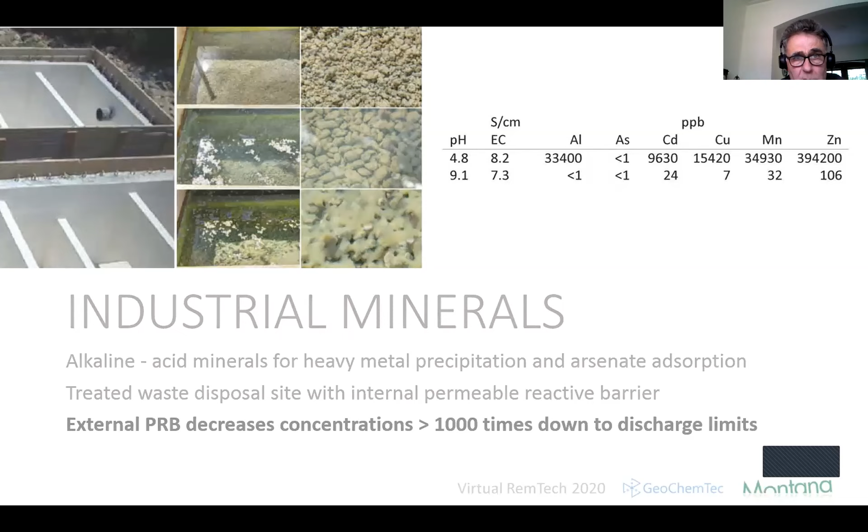Water flowed from compartments over and under the septa between them. Now, what's next? Next year we're going to do another treatment of mine gallery water, which we did before, where we observed we could treat this water at much higher velocities—tens of cubic meters per day—but there were also lower heavy metal concentrations, only a few tens of milligrams.

We succeeded in treating that as well, but during or just after winter storms, we had situations with a tenfold increase in concentrations in the water and a much higher flow rate, which was problematic for our filters—they couldn't handle that properly. Later they regenerated with lower flow rates and worked perfectly.

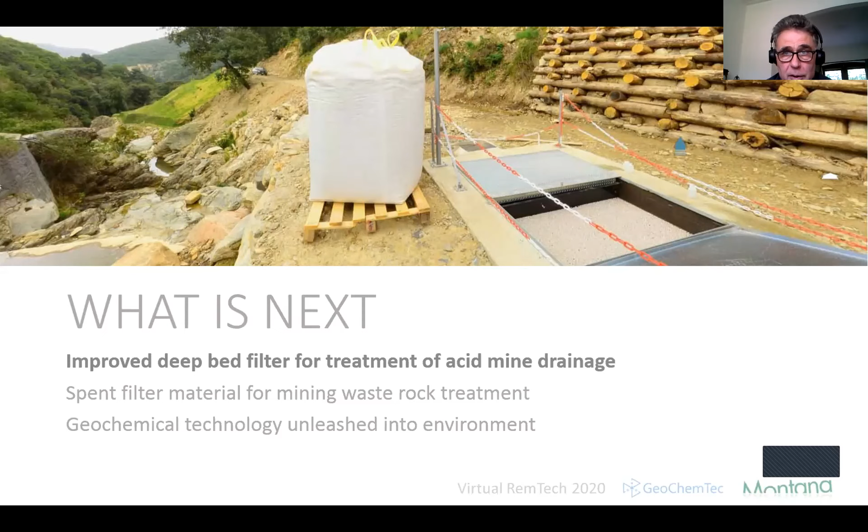But now we have to do better and improve this with new materials, and that's what we're going to do. We're going to improve the filters, make the materials a little more reactive. We're also going to use local materials to make our granules so we can save on high transport costs. And we're also going to teach local operators how to operate our filters, so we must have more readily accessible protocols to operate these filters. That's all we're going to do next.

Together with Montana. Another thing we want to do, I hope, is use that spent filter material in other treatments, because it's still very reactive—not reactive enough to maintain the strict discharge limits in high flowing water, but certainly reactive enough to treat the percolate in solid mining waste or in soil, which flows at much lower rates. And we already did some tests to prove the concept.

Treating waters of this mine by Montevecchio, which flows at 50 liters per second and has 1000 milligrams per liter zinc—you cannot treat it here because there's no space, but maybe we can filter it with mining waste mixed with our pellets. We tested that and were successful on a very small scale.

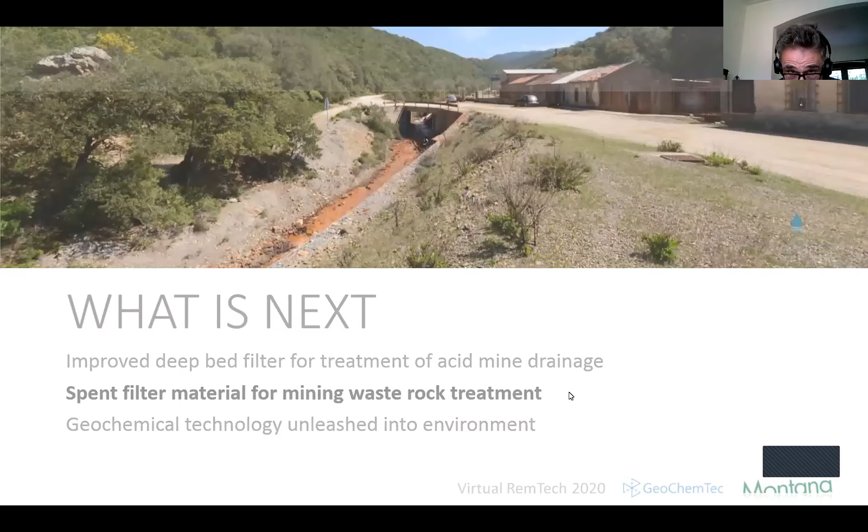And let's say all the easily removable, erodible and leachable parts are gone, and what is left is something that doesn't leach and erode as easily. So now you should not, I think, start to dig this up and then reactivate it and deposit it somewhere else to make another problem on another site.

You must leave it here and then cover it with reactive minerals like I showed you before, and make sure that the water can flow through them, and that we make a soil out of the waste that is in this area, and cover this waste disposal site much more adapted to the dynamics, and then going with the geochemical cycle instead of going against it.